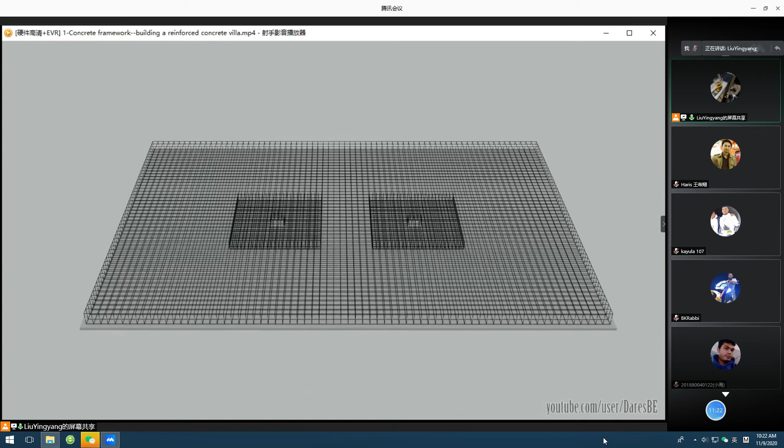Can you share my video? Okay, first we have a quick look at the formwork for construction of concrete. Okay, this is a foundation, right? You can see the reinforcement bars at the bottom of the basement, and also some reinforced bars at the top of the basement. You can see the reinforced concrete bars for both the basement plate and basement floor, and also for the columns. And also for the vertical structure, you have to make the reinforced bars, right?

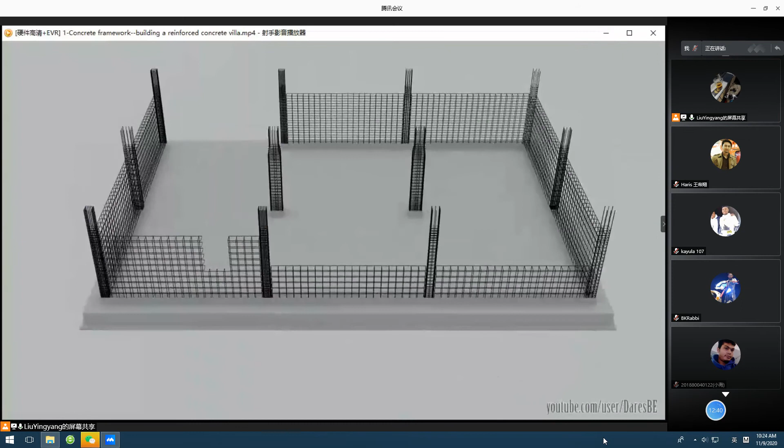Obviously, the reinforcement steel bars cannot support the load of your pouring concrete, right? So for practical engineering, you have to make some framework, just attached to the reinforcement. And then you put the concrete there, and at that time the framework will bear the gravity of the concrete. After settlement of the concrete, you can remove the framework, and the concrete itself will bear its own gravity, right?

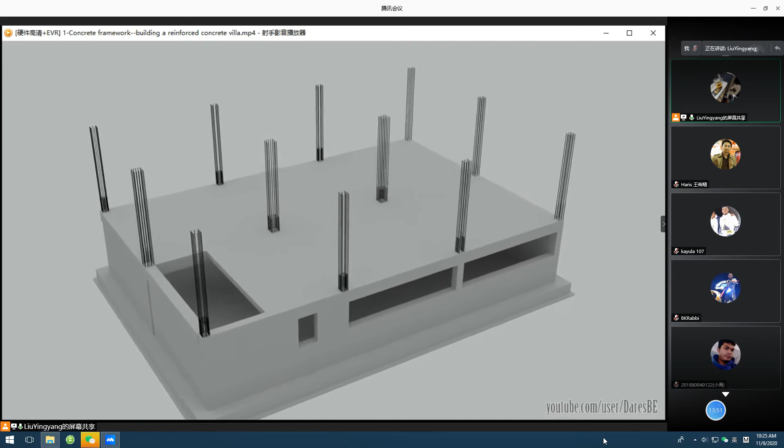Here, for the second floor, when you're pouring the floor, the concrete for the floor—how do you support the gravity of the concrete before it settles? You have to make some support system, which we already touched on in the introduction chapter. So here we also use the framework to support it vertically, right?

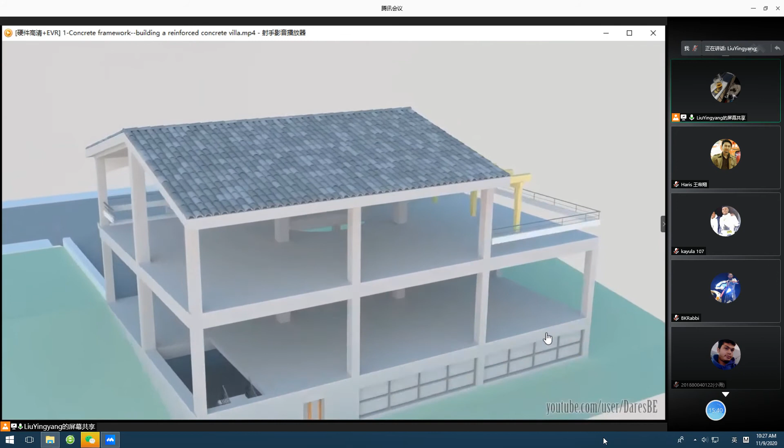Okay, this is the finishing work to make it a real structure.

Okay, this is a process of the concrete construction with steel reinforcement bars. During construction, the steel bars cannot resist the gravity of the construction materials before the settlement of the concrete. So we have to use some temporary support.

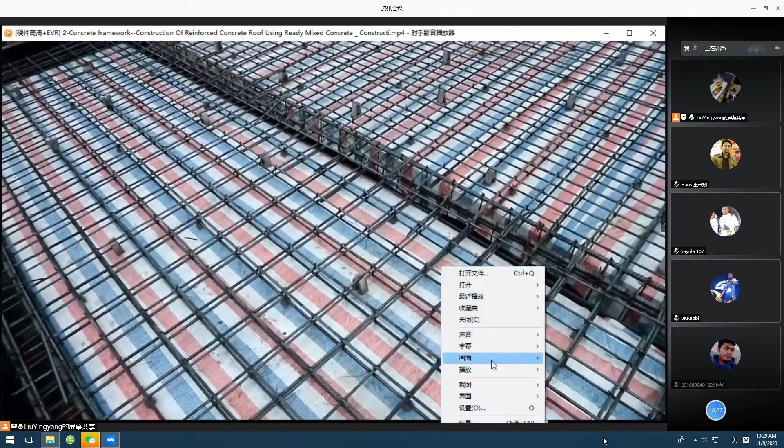The formwork, right? The formwork. Okay, I'll show you how the formwork is. This is a video I showed you before, but once more I'll speed it up. Yeah, look at the framework, right? Framework, okay.

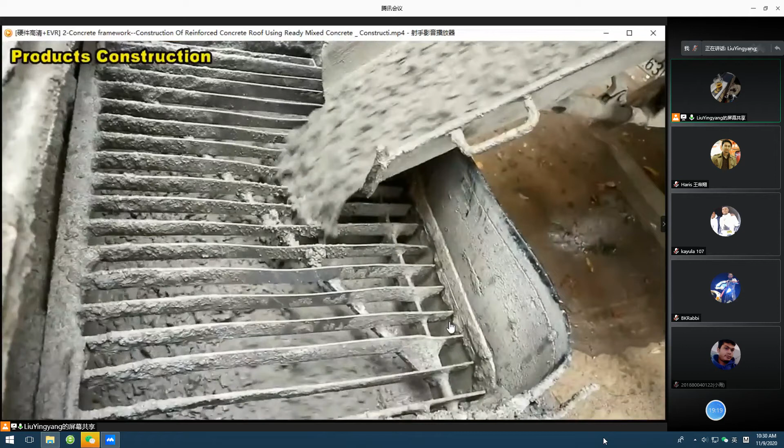Yeah, this is concrete, the concrete coming, and then you pour it onto the roof, right? But before the roof settles, it has no resistance by itself, so you have to use some support system. To make the concrete well settled, you have to use a vibrator, right? This also increases the load on the roof.

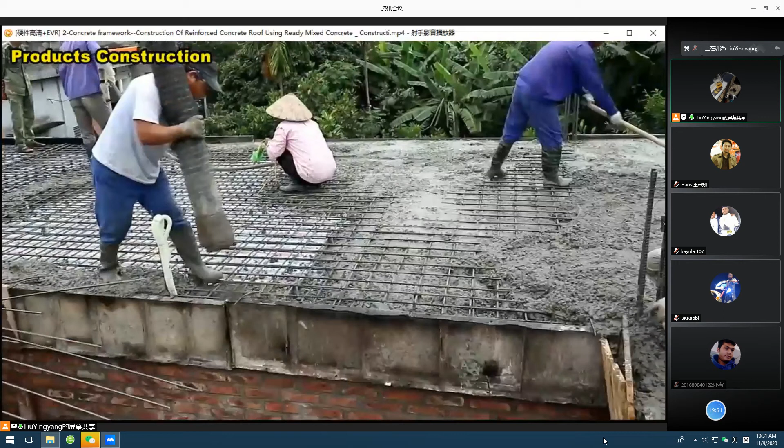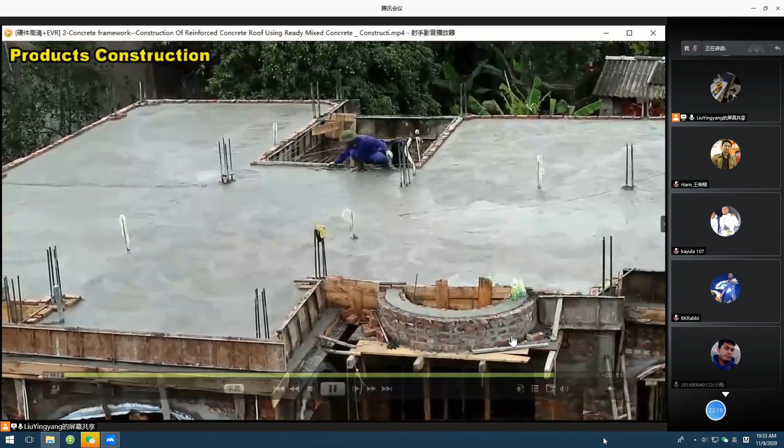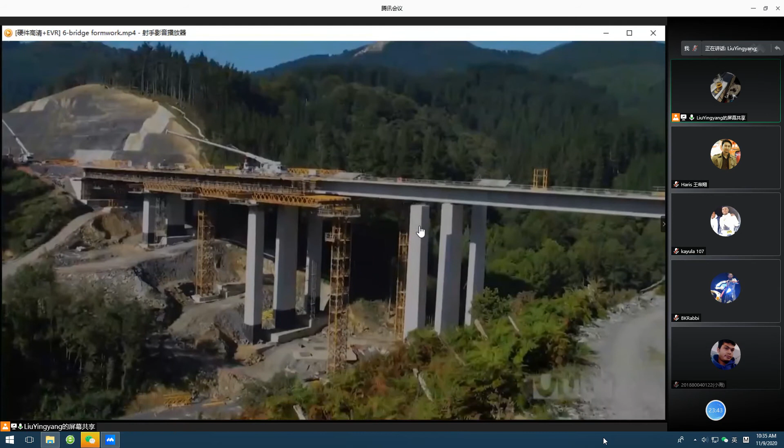Okay, that's it. That is the framework for a residential house, right? That is the framework for a residential house. Also, we have some framework for bigger or huge buildings, just like a bridge or highway. Let's have a quick look. Okay, this is the framework for a bridge.

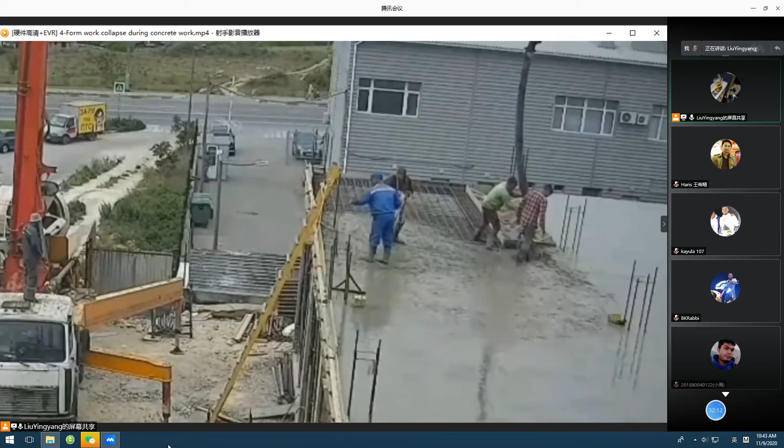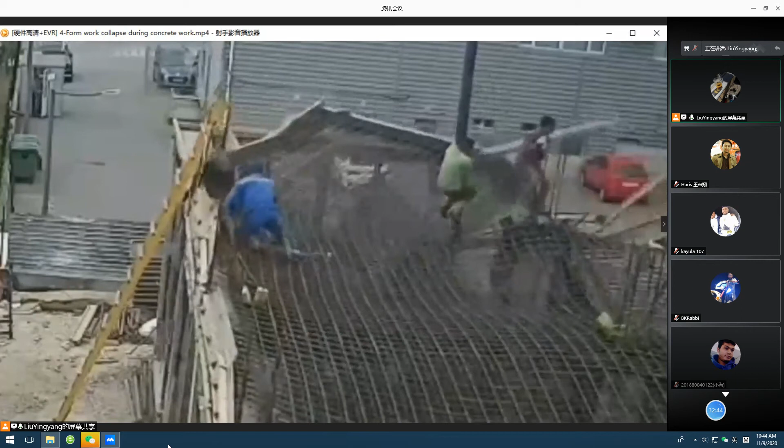Okay, this is another one. You can see, you can tell the unstable underneath, right? Very dangerous, right?

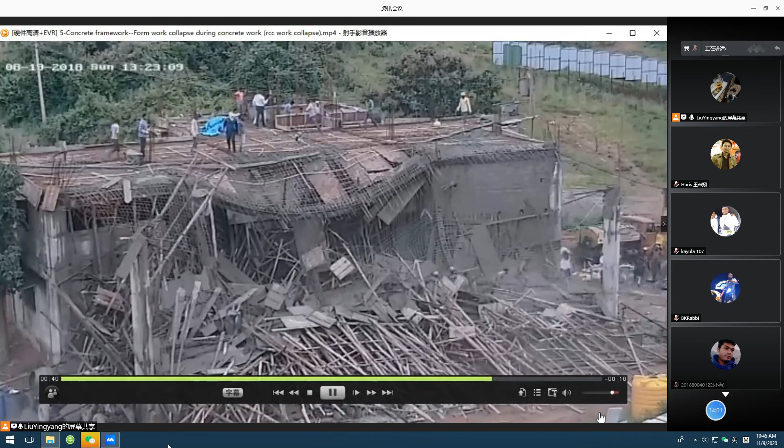And the last one. Okay.

Yeah, the framework is worth calculating, right? Calculate it. That will save lives, right?

From the three videos, people are not killed, for the relatively low height of the walking platform, right?

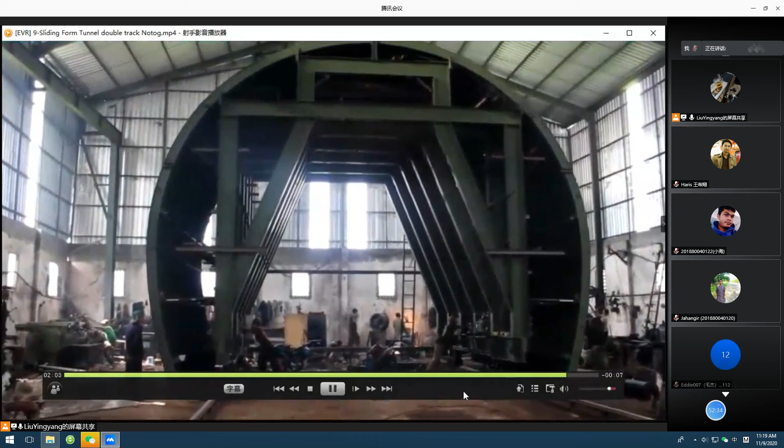Okay, good. For the sliding formwork, we watched bridges as an application, and bridges, shear walls, and the tunnels, right?

This is mainly about the system in the horizontal direction, right?

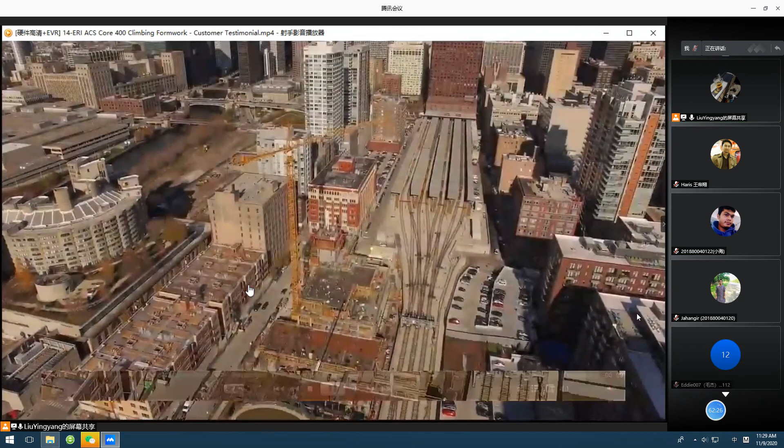We're nationwide, we're number one. This is in practical engineering for the on-site climbing form construction. Different construction industries like bridges, water treatment plants. We do high rises all over the country.

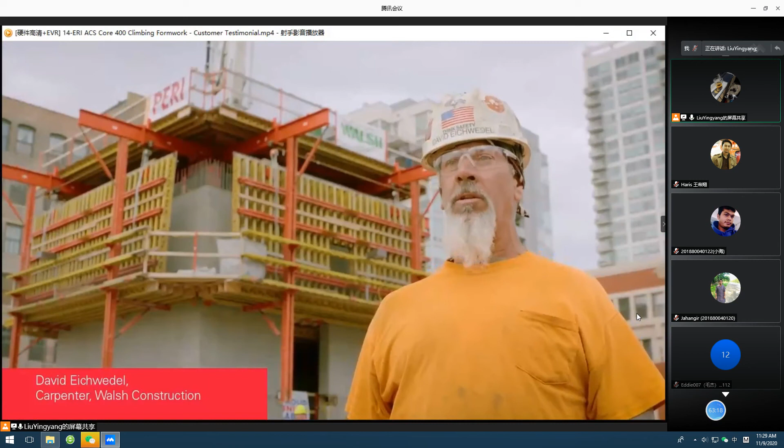PERI are the suppliers of our core system and all our conventional decking systems, our gang walls, outside platforms, rollback walls. So basically they got everything that's bringing this building up. They're really experienced professionals that have everything on hand. We expect top quality, efficiency, and we expect the best from them when we bring them on a job site. PERI has been able to meet that standard and more. We're very happy with them. Right now we're working on a 33-story residential building with a couple floors of parking garage.

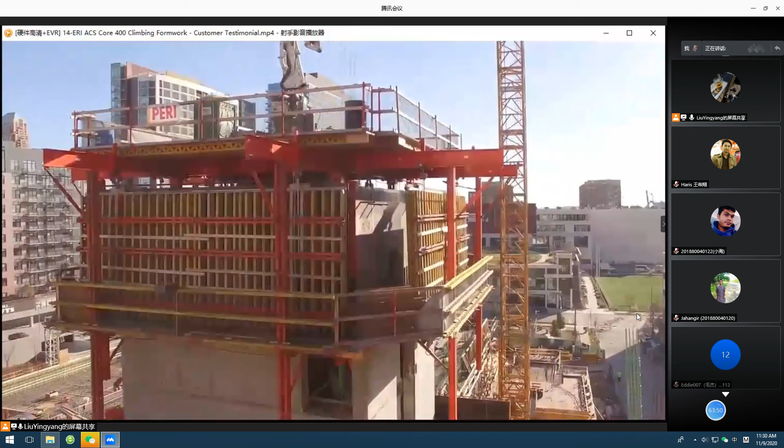The ACS 400 is nice working, it's simple, it climbs smooth. Engineering on this design is brilliant. The PERI ACS 400 system is a good system, one of the best I've ever worked with. It's fast, easy to assemble. You don't need too many manpower. I got 2 guys plus a laborer. It was real easy to install. Less guys working on the core means more guys can do other things on the project. The process of stripping is I have 1 guy taking out all the anchor bolts, and I go outside and knock out all the ties.

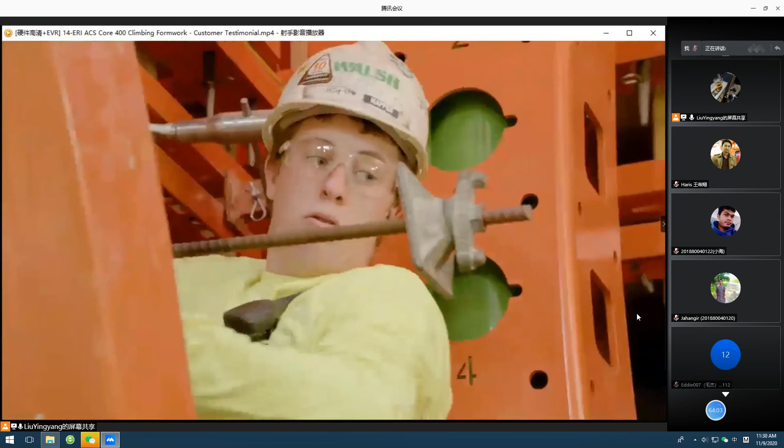Outside platforms are nice and roomy. You can roll the walls back and still have room to walk behind and store equipment.

Then we strip our door bucks that we have to strip. We knock out the wedge pins. It retracts the wall very easy, very fast.

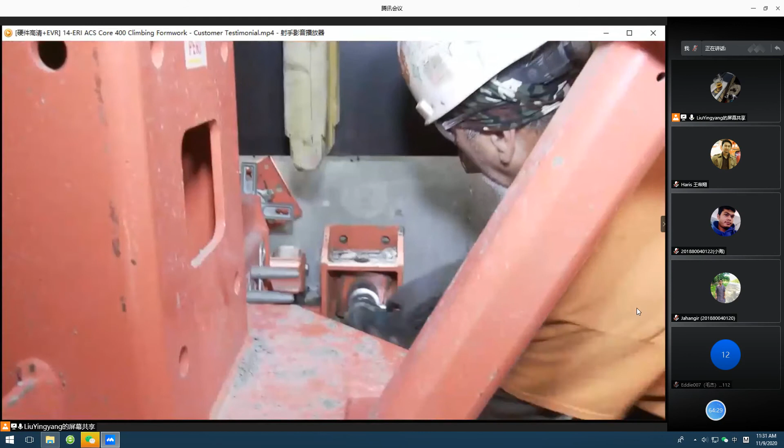Take the anchor bolts out of the bottom. Then we hit the machine on, and we're ready to raise.

The climbing process, the PERI system is a little bit faster than other systems that I use. It's a little bit smoother, comes up nice and level, the walls break off freely. It's pretty simple, it's pretty nice.

Fast, it's efficient, it climbs quick. There's no problems with the rollbacks, no problems closing up, holds well. When we're pouring, we can pour full liquid head without any problems.

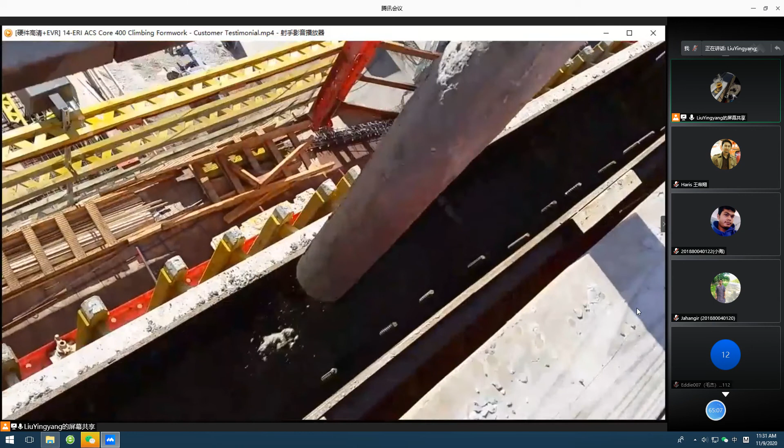So it's really efficient. They chose the system because PERI has a good reputation. They do good work, they have great service. If you have problems with anything, they're right out. Their field guys are great.

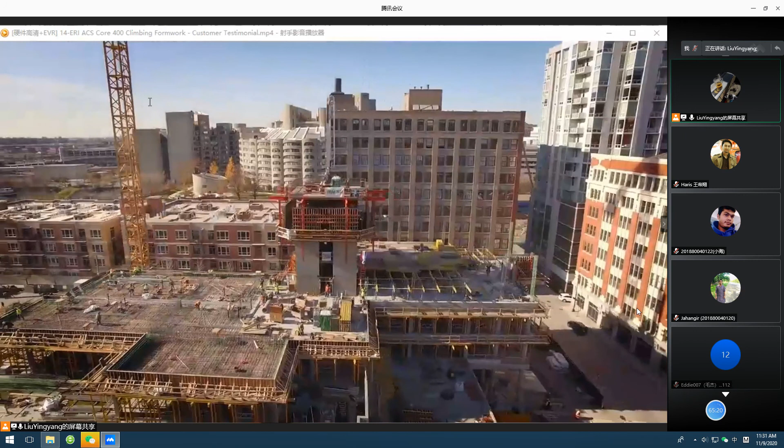I sure would recommend the ACS 400 to the next job. It's easy to work on, a lot less climbing, easy to install and break apart. This is the first time we use it, and we have nothing but good to say about it.

I'd recommend the ACS 400 to anybody that wants to do a quick, efficient job. We'll definitely use it again. I'd say it's the Cadillac of systems.

Any contractor that wants to put a good product out there with quick results and less manpower, I would recommend it. This system makes my job simple.

Okay, this is from a construction site. We see the cast in place concrete, right? Concrete, okay.

Okay, for the next video, I'll show you the cut section of the climbing formwork to see the cast in place more clearly, okay.

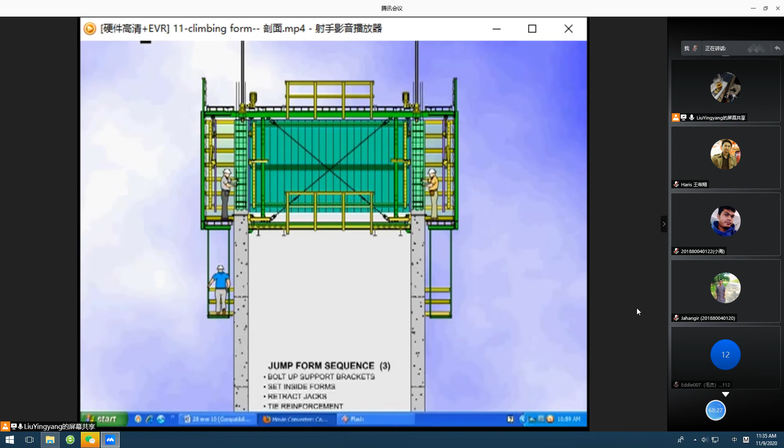For the cost, I don't think so, but you save labor. You have to compare the cost of labor and the cost of the equipment, right?

Okay, and I'll send it. Another use of the climbing formwork is for the chimney construction.

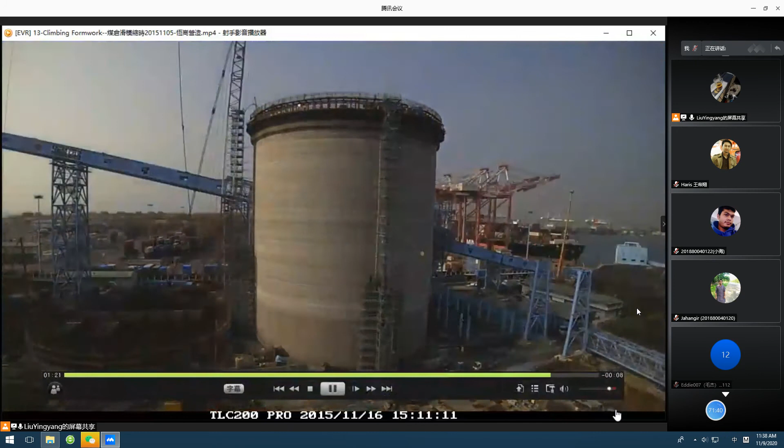Right, you use the climbing form right from the very bottom to the very top, right? The one formwork, all has been done, right? Very good technology—you save time, you save labor.

Okay, this is the second one, the second system, for the vertical construction. The climbing formwork.

For every step you stop, it depends on the architecture, the function you want to have, right? Four meters is a reasonable height.